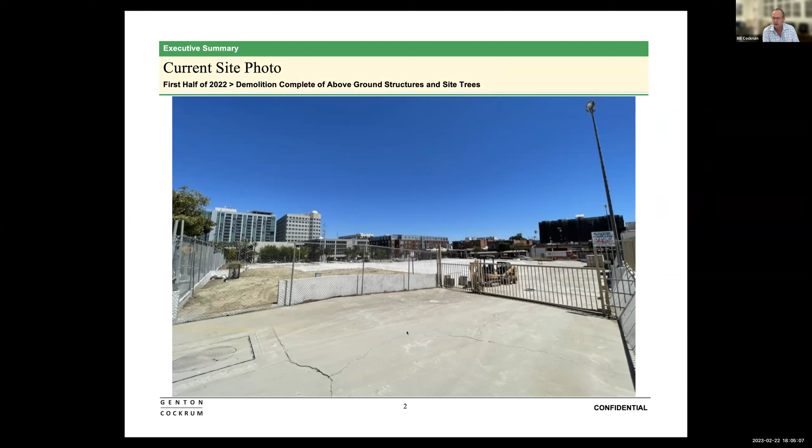Here's the image of where the project is now. We've demolished the building. There was a little bit of remediation of some asbestos, and basically the site's cleared in the current condition. It still does have an active demolition permit on it, which leads to challenges for using it for anything else. Even though the land's there, we can't really—there are all sorts of liabilities and things of having that open permit for doing other things in the moment.

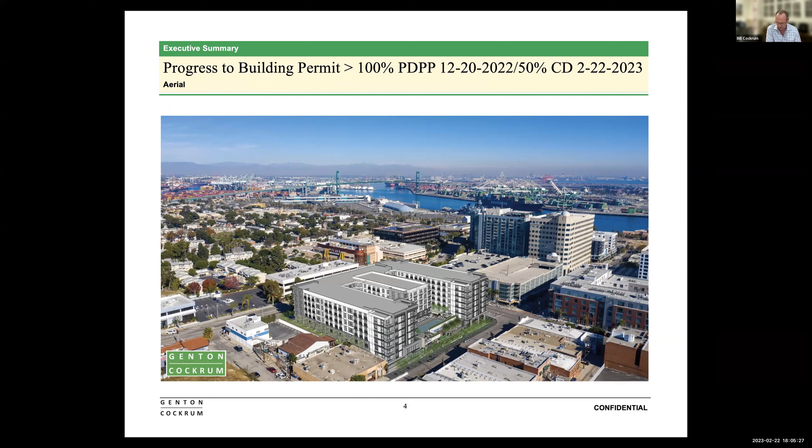These are some images you've seen probably before. We posted them on our website, and I think we've shared them with others, but just to give a sense of what the scale is. The project was entitled in 2020, and because of tolling that occurred during COVID, the entitlements will run technically all the way through January 2026. But we wanted to come back and give you a sense.

So we've evolved now. This is built off of a construction model, so this is a higher level of CGI. We're still playing around with colors, so you see there's kind of a little bit of a dark blue on here. We're going to keep playing around with those, but the general shape and design, nothing's really changed from what the entitlements are. It remains 300 apartments over a 2-story ground floor, because there is a 20-foot height change in the site.

The change goes from the corner on 6th Street and Center being the low point, and on 5th Street, kind of to the northwest, is the high point of the site. The corner here is what would be the food hall, and I've got some interior renderings and overlay to give you a sense of what that is. Our goal is to make a space that would be really another anchored tenant for San Pedro, and help bring people to the downtown that may not necessarily have come to the downtown, or pull people from the port, another point of interest, up into the downtown. We'll get into that.

We've tried to create a lot of different activities and kind of a food centric offering that's different than what's there, and we believe it would be enhancing to the downtown without being competitive.

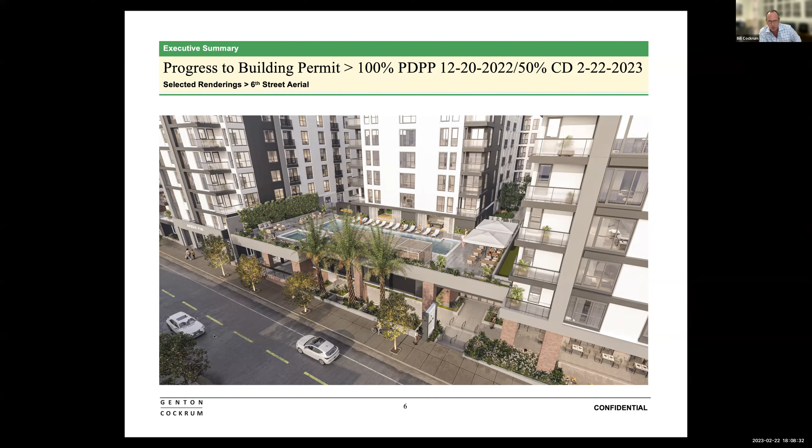One aspect here is that this is a computer generated image, and the artist takes some liberties at times. So the landscaping may not look exactly as it should, but it will be accurate in the final versions.

This gives you a sense of scale of the building. It's really about 8 stories. Using my cursor, the top 6 stories are the residential units. The bottom of those 6 stories is cement, the top 5 are wood, and the whole base is steel reinforced concrete, of which the bottom 2 levels are subterranean parking for the apartments.

The 2 stories in the middle are probably where we spent the most time over the past year and a half, relating to the food hall and restaurant and integrating that into the streetscape, as well as the subterranean electrical vaults, which have gotten significantly larger.

There's a requirement that we have electrical capacity for 30% electric vehicles in our parking, and 10% of the spaces will be installed, so there'll be 50 chargers in the building. That's been a big impact working through with DWP - making sure the vault is sized properly and integrating all of that into the ground floor areas.

Also, as it relates to art, there's a $1 million art budget with the county, some of you may recall. There are 3 primary locations we're starting to identify with the LA County Art Commission.

One is on the corner of 6th and Center, out in the landscaped areas, a location for sculpture or a larger exterior piece set in a high profile position on the corner. Also this wall, a walkway between parking - there's at grade about 80 parking spaces intended for the commercial next to the food hall, with a walkway and a large wall space that could almost be a secondary art space.

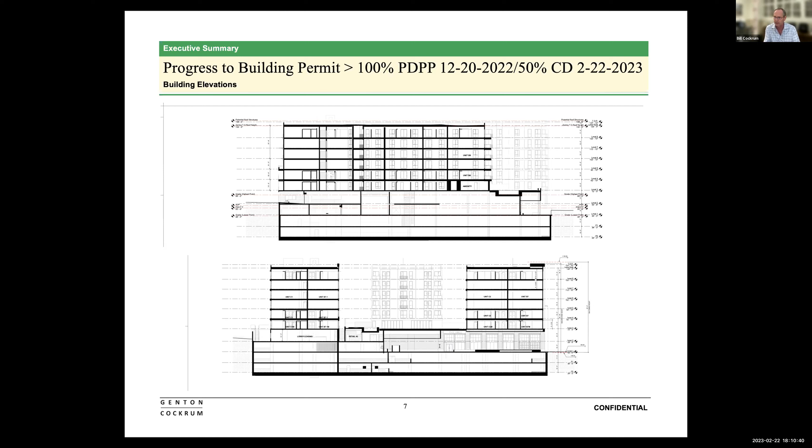We've also looked at whether it could be something we do with community art or displays, or maybe some kind of rotating installation. There are various ideas of what we could do with that space, whether it's with the county art program or we do it ourselves, embracing the local art community and trying to figure that out.

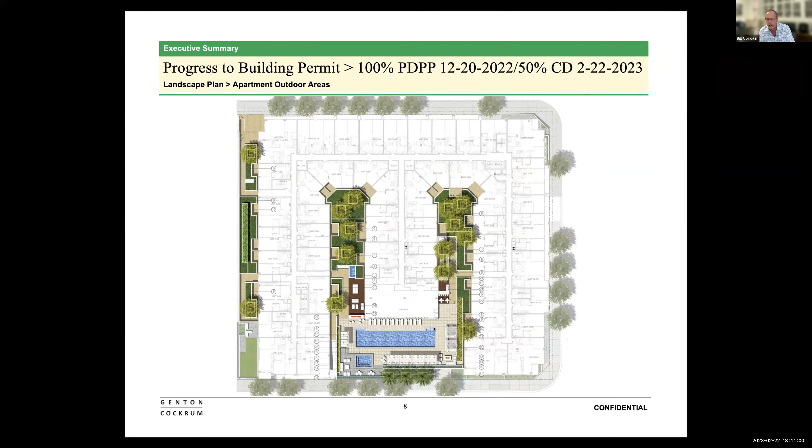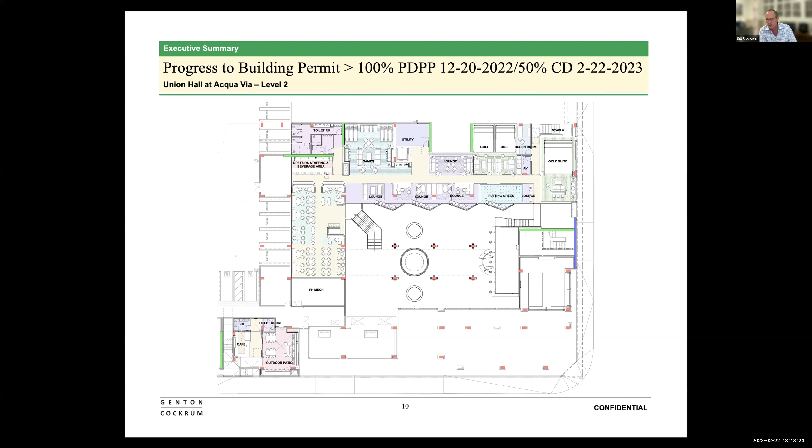There are three main zones to it. One is this zone on the left, which has the ability to be a lot of multi-purpose uses—small scale, intimate music, comedy, meeting spaces, and also audiovisual for sports and other things. In the middle is a game area, which could also be for video games, skee ball, and pinball. Then on the right is a golf zone with 3 golf swing simulators and a putting green.

As you see in many of these types of buildings, they haven't really thought through these ground floor areas, and they just sit vacant for long periods of time. We've fully designed this, fully integrated into the base building so that it will open at the same time as the building. Our plan is to start construction this summer.

It should take about 2.5 years to construct and open—about 6 months of excavation and about 24 months of construction of the building. Sometime in the latter half of 2025, we'd expect to be open with all aspects of the property open at the same time.

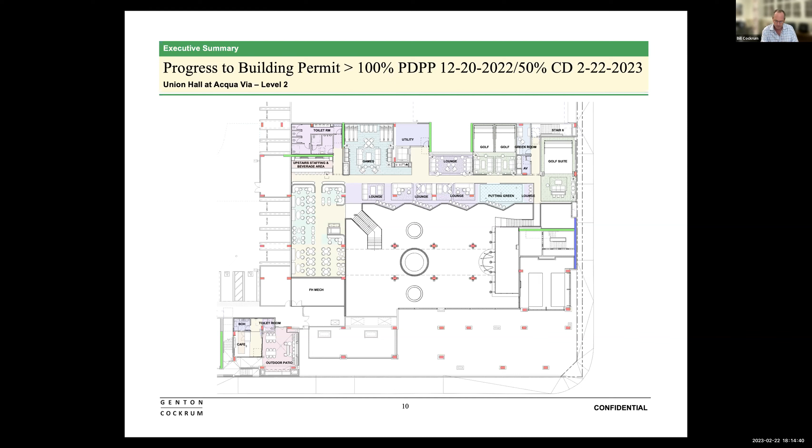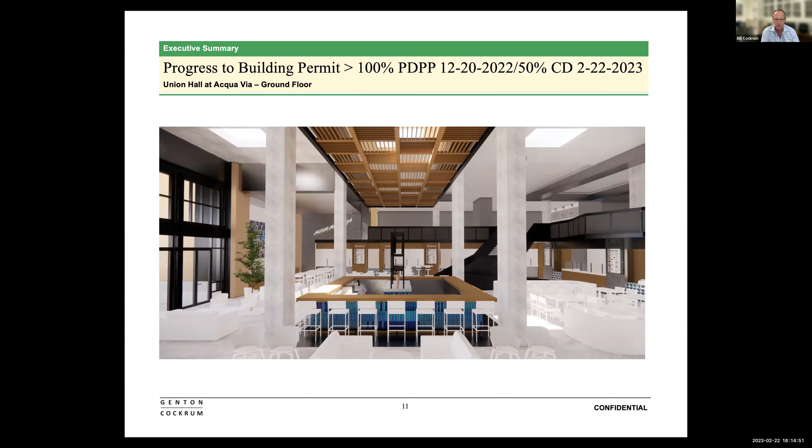As we move forward, here are some interior renderings. This gives you the central open space in the middle of the food hall, and you can see the vendors around the outside, as well as the spaces up above and a main staircase.

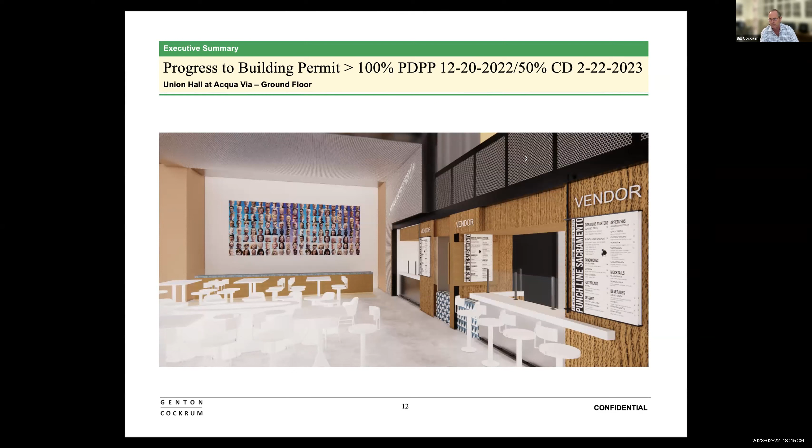In addition to the locations outside for art, there's also a main wall that could be a location for art. It's got great viewing from inside and opens up possibilities just because it's indoor space as opposed to outdoor space.

This just gives you a look around the outside at the various food, which would be a diverse offering. We also have a wall here—this is the entrance off of Centre Street.

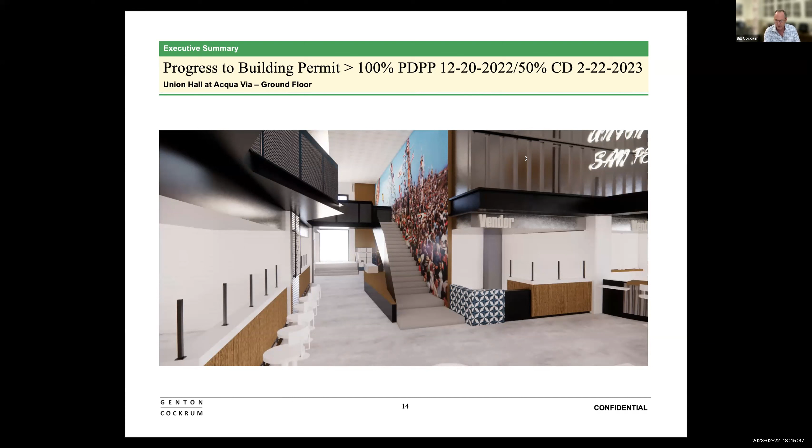This was a picture of one of the old Fiesta celebrations from the tuna fleet. Our expectation was to do some kind of large photography on the wall that would celebrate the history of San Pedro. This was just an indicative image, but we still have to figure out the details of that.

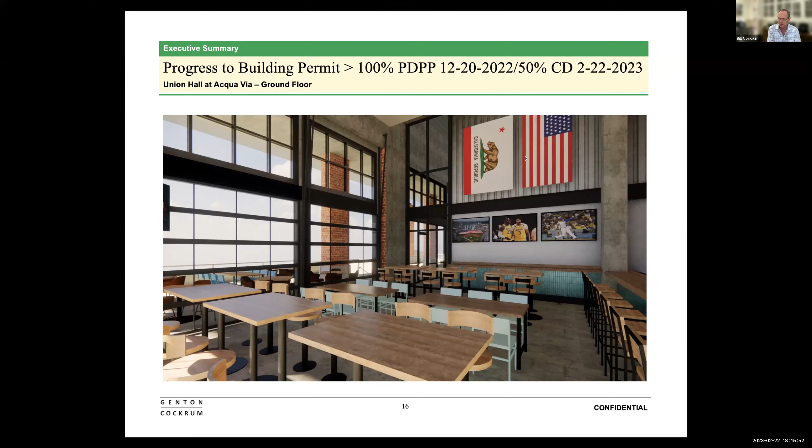This wraps around additional vendor spaces. This is the corner where these roll-up doors come up. The intent was for this to be sports themed with maybe a few extra TVs, giving you a great sports viewing location—again, a gathering place for people to go, and also a broader regional notoriety to attract people to San Pedro downtown.

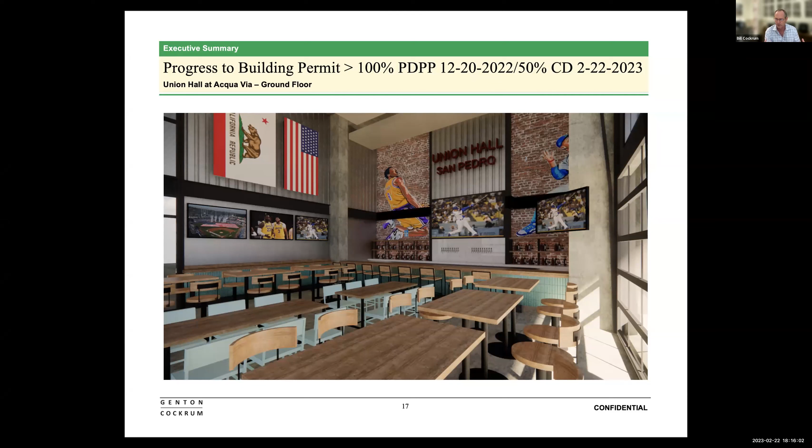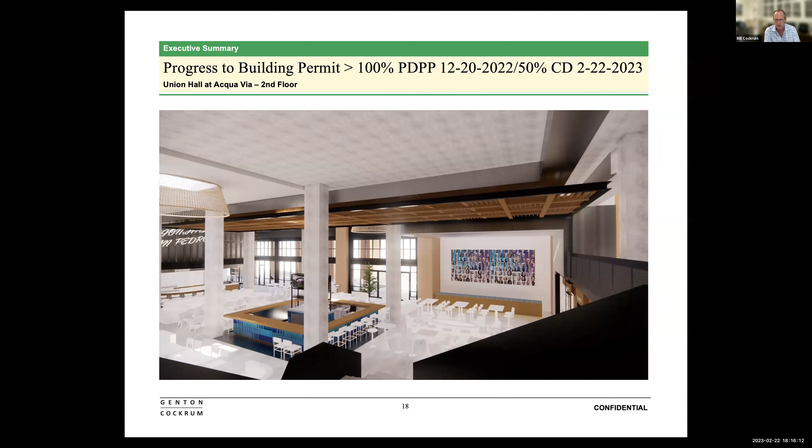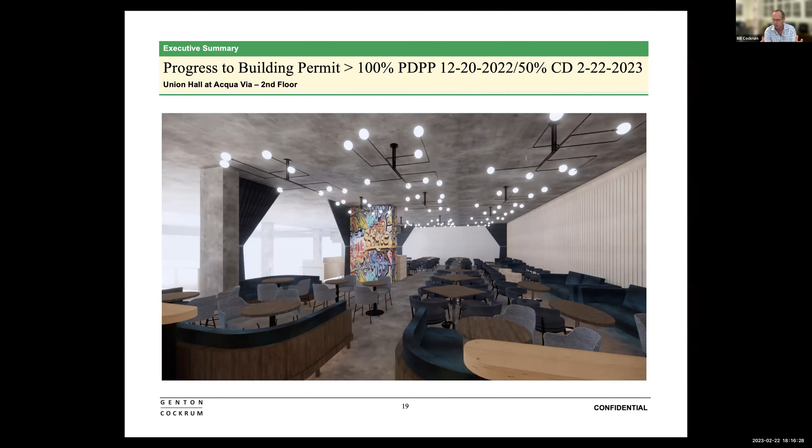This is the upstairs multi-use space that could be live music, meetings, presentations, movies, or sports, given the variety of what's there.

I also wanted to mention we've been working through this very collaboratively with the City of Los Angeles. We very much appreciate all of their efforts and support.

And it remained true to the initial vision, which was to provide a mixed-use project that provided not only housing, but also, it's not part of the base entitlements, but as part of our own mission statements, we want to provide 20% low income affordable housing. So there'll be 60 of 300 units, and we'll meet that requirement by our own goals and objectives.

In terms of other pieces we talked about previously with the neighborhood councils, the haul route we had originally proposed was going on Gaffey. There was a request from a prior meeting that it be moved down Fifth Street to Harbor and out, which we have done. So we have an approved haul route permit that does that. We'd be open to reacting to a different group thought from the neighborhood councils, but we made that change in the permit as a result of your feedback.

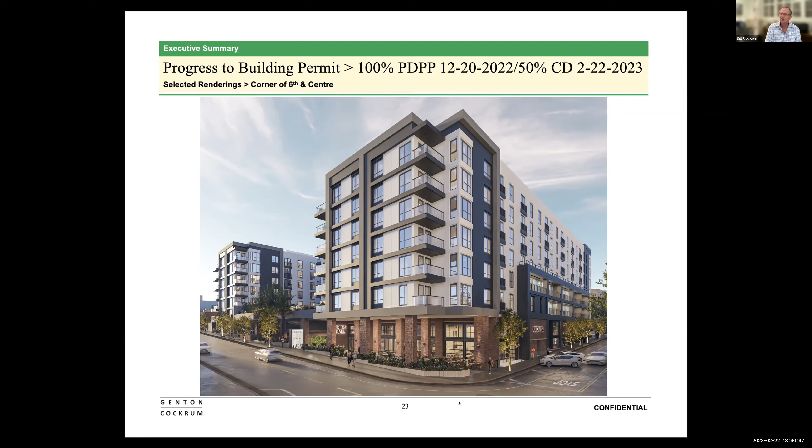We're going to move on to our next item. Let's see, is Juliana Moreno here? Let me see, oh yes, I got to promote her. I knew a port lawyer that looked like you, so. I hope you look better than I do now.

Okay, our next item on the agenda is the Phillips 66 Marine Oil Terminal Engineering and Maintenance Standards. We have an update on the project by Juliana Moreno.

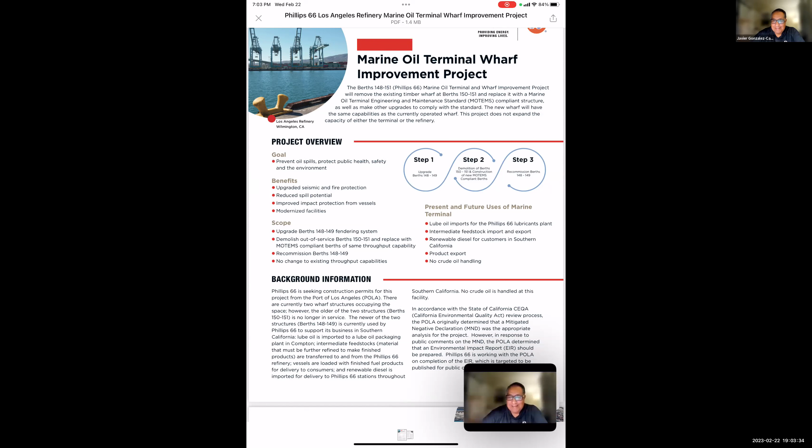Thank you. Diana? It's actually Pat. Oh, Diana. Pat, my computer sound is not working, so I borrowed her laptop. She's right next to me here anyway, so she can poke me if I'm saying something wrong.

The project description that'll be in the NOP, and I'm sure you guys have worked on it with the port and their consultant - is the project description the same as the project description that was in the MND, the mitigated negative declaration? Yes. Thank you. Yeah, the project itself is not changing.

Well, correct me if I'm wrong, Tim, but we went through the process, did an MND, and they got so many public comments that they decided this was such a sensitive issue, they needed to do a full-blown EIR. So what's going to be in there as far as describing what the project's going to entail is not changing. It's just doing it again in a different document. I think that may be the source of some of the confusion too.

Mr. Waller and Tim, the project description in the MND included refurbishing a number of tanks and replacing a number of pipelines throughout the terminal. It also included the statement that the capacity for throughput would increase from 6 million barrels a year to 13 million barrels a year. So what was wrong with the MND that said that?

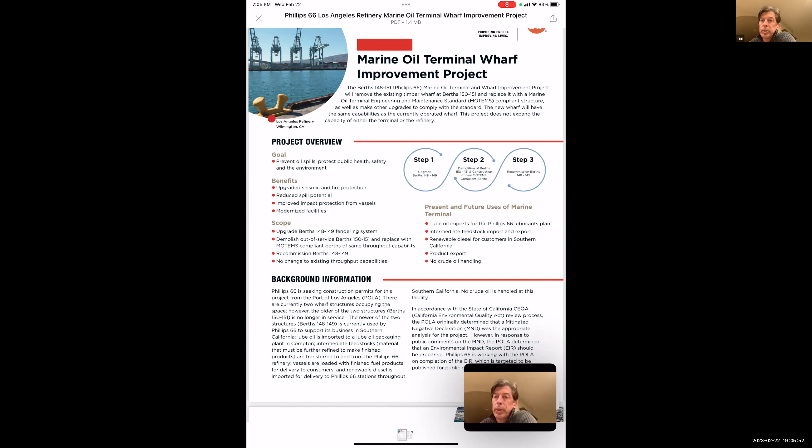I'm thinking that leads to another question. Perhaps we can approach it this way. It's possible the MND language can be interpreted to say that because you have a couple of docks out of service now since they're not MOTEMS compliant or earthquake safe, once those are either taken out of service or refurbished, you'll retain or obtain the capacity you nominally have but haven't been physically able to attain. So what will be the throughput capacity for the terminal once the MOTEMS work is completed?

Marshall, could I get you to jump to the second page of that one pager?

One thing to note is that the marine terminal is not currently being used up to capacity. So what's being included in the project description is what the actual capacity is. I think Tim, I'll let him elaborate, but as he mentioned before, a few years back there wasn't any sort of need or demand really for renewable diesel, and I think that's one of the products being moved through this marine terminal. Tim, did you have anything to add to that?

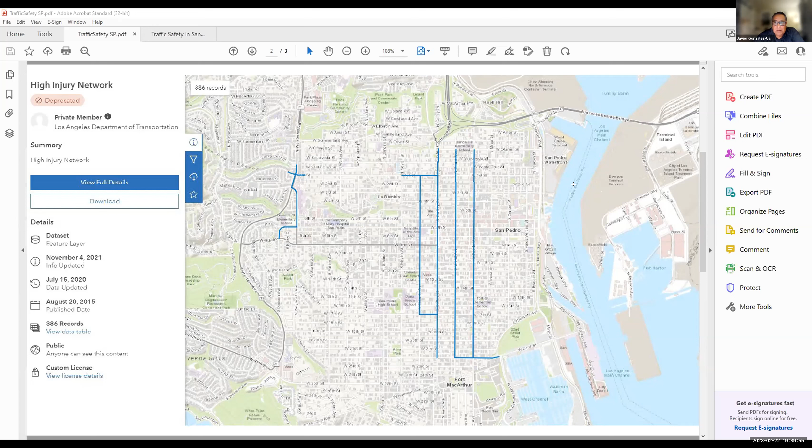So the city has that under review, and as you can see, the segments in blue are the areas in town considered part of that network — Gaffey, Pacific, Grand Avenue, and I believe this one is Cabrillo. As you can see, we have a high number of streets that are part of that network.

So obviously there are issues, and as a result, the city came up with street safety improvements over the years. Between 2013 and 2019, there were 21 severe and fatal collisions on the Gaffey Street section alone, and I'm sure we'd find similar numbers on Pacific and Grand. So they've incorporated different ways to control traffic and slow it down to make it safer for cars and people.

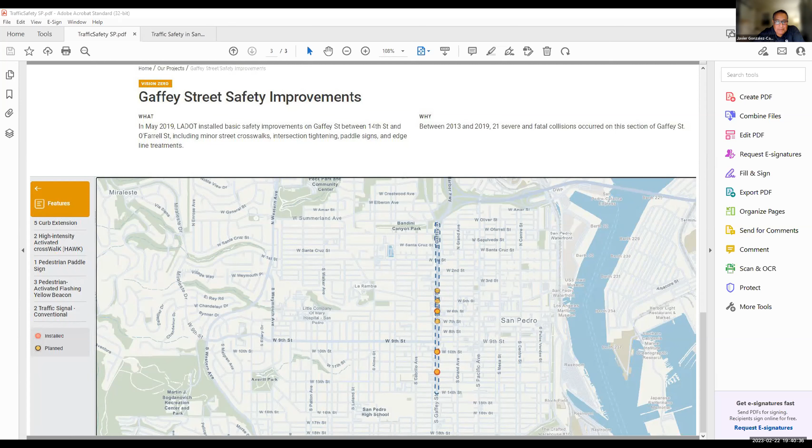It basically states some of the problems we have, and obviously the problems are not just on Pacific or Gaffey, but the city in general. We figured this would be a way to get some engagement with the city and start talking about some of these problems.

Some of the problems are not just traffic control, but also how to have people respect the laws, which is a little more difficult given the amount of police personnel that we have in town.

Does anybody have any comments or questions?